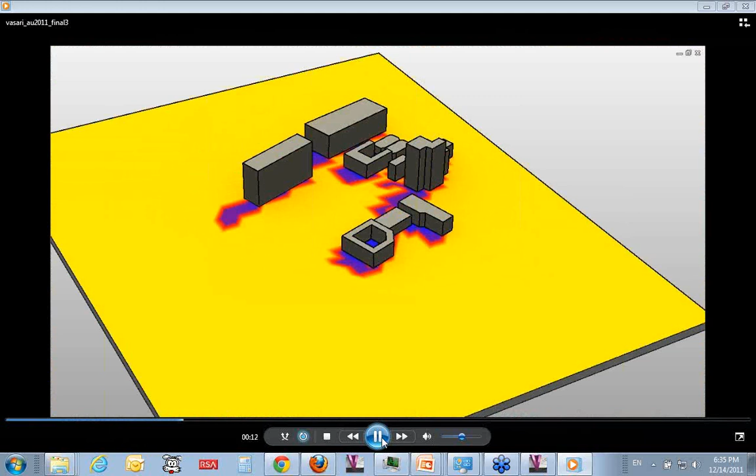Basically, with Project Vasari, and let me know if this doesn't play well here, it looks like it's keeping up, you can start to do some preliminary understanding about the site, look at various ideas of blocking and stacking and fitting programmatic requirements into a design, run it through a various set of design analysis, looking at solar radiation, whole building energy analysis, and then tying that into a parametric model that you can start to control and configure, and start to figure out ultimately how well that particular design is going to perform, and then start to evaluate different options early in the design process, either for new construction or for renovation and retrofit work.

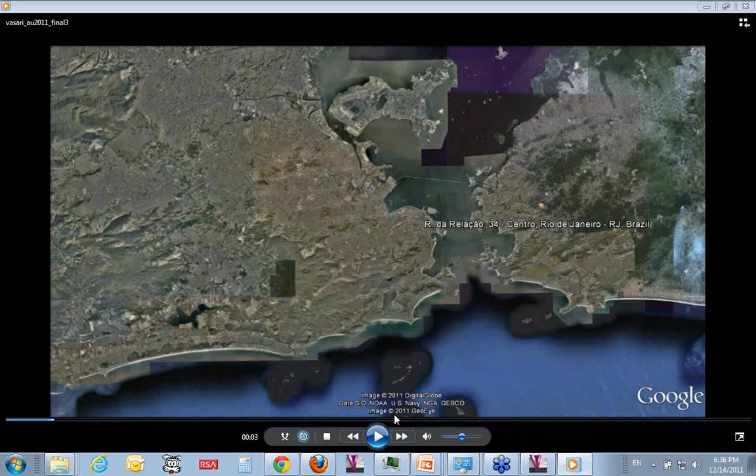So here's kind of just the general vision of what we're doing. A lot of the features that we're talking about are tied into new technology that we're working on inside of Autodesk, specifically related to the cloud and analysis, right? So we're moving away from pure modeling into what else we can do inside of the cloud and tying into other capabilities that don't just run on your local computer. So just kind of a quick overview of what we're doing.

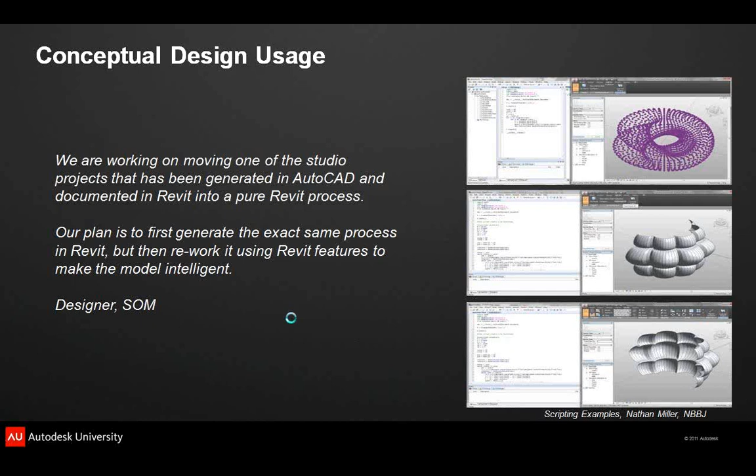A couple things over the last year, I'm not going to read all of these, but basically there's been a strong resonance in the industry using these kind of tools, streamlining workflows, tying things together, and ultimately trying out as many different ideas as possible early in the process and informing the overall later design from there. Both at the low end and also at the high end, looking at various scripting capabilities, and now looking into visual programming capabilities as well, and at a variety of scales, both at the macro urban scale and all the way down at the detailed scale. And ultimately what we're trying to do is take capabilities from a variety of different tools and integrate them into a main design application.

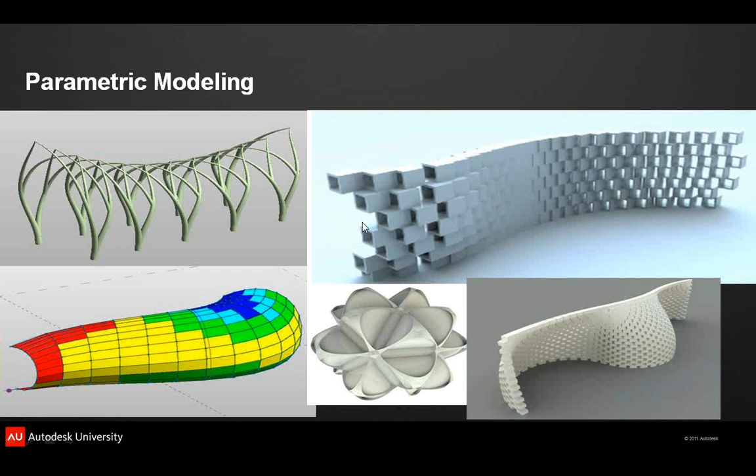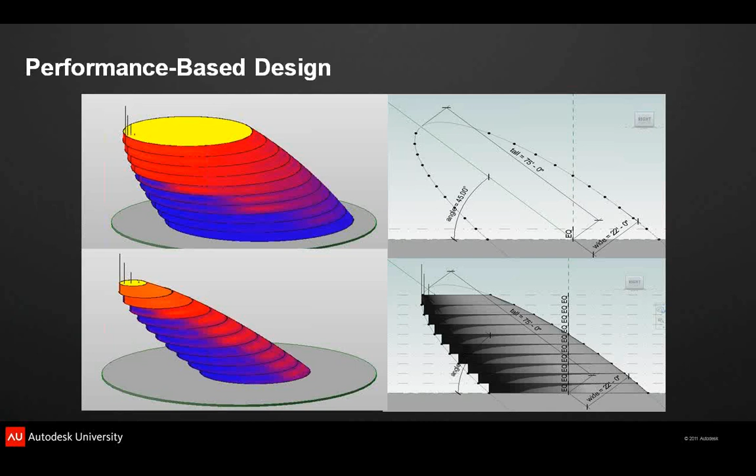So just real quick, started from Revit 2011, slimmed down, focused on 3D modeling. A lot of parametric modeling, so focusing on not just making an overall form, but assemblies of forms that understand how they relate to each other, and ultimately behave as essentially a big rig that you can change one thing and have it propagate through the rest of the design, and operate on that in a variety of different ways with various user interface techniques. The idea of integrated analysis, so having things that are happening real time in your computer, you don't have to hire a separate consultant or export to a different tool. And then looking at more advanced things that used to literally have to run for multiple days at a time now can be run on your desktop in real time.

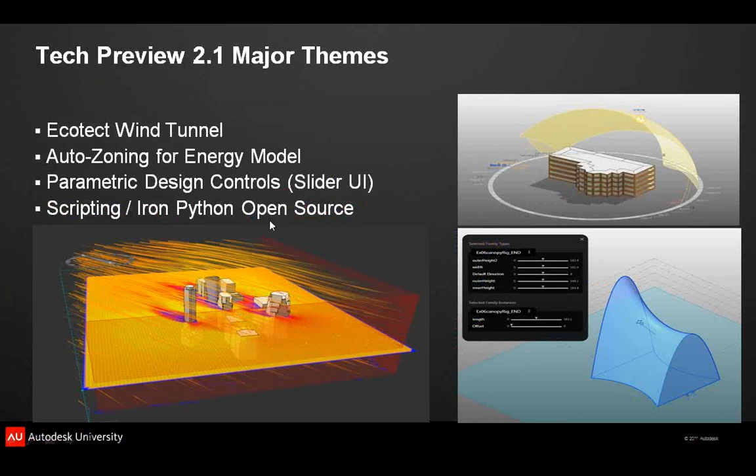So I'd definitely encourage you to take a look at the new tools that we have. We have some pretty interesting things that we're working on around simulation, around parametric modeling, and ultimately making things usable for a larger audience outside of the Revit ecosystem. So that's just kind of my quick overview here. Basically, we think that the industry is kind of at a cusp on how people are looking at not just conceptual design, but overall modeling.

And there's a lot of push towards integrated analysis and ultimately getting to something that's more sort of performative design or performance-based design. And we'll talk a little bit more about that in the future.

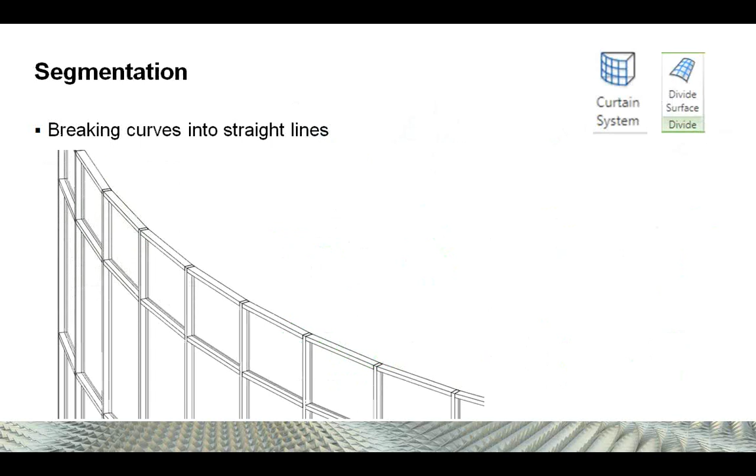In Revit, one of the basic ways that you can start taking complex geometry and breaking it down is through segmentation. We've got a set of tools that are particularly made for that: curtain system and divide surface. There's some distinct differences between each of them. The curtain system was something that was created a few years back, particularly around stick-built geometry, or stick-built sort of storefront curtain system. And divide surface, which is sort of a more generic way of spreading or repeating points along a surface and sort of connecting the dots.

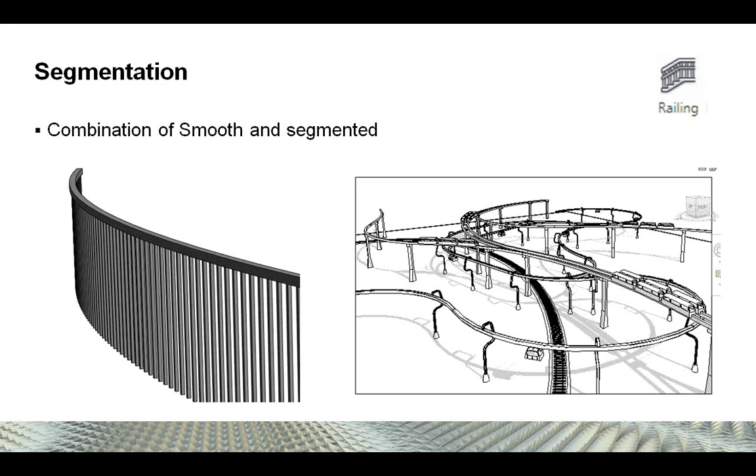Railings, which have been misappropriated in all sorts of ways, because by and large, geometry for architecture are very small elements that are repeated many, many times. And the railing tool is one of the tools that can do that. So people end up with all sorts of geometry in their buildings that are called railings that are really not. But at base, what you're trying to do in this sort of discretization of your complex geometry is breaking complex geometry up into individual pieces and making manipulations on them. And this is quite handily dealt with by this divide surface functionality.

And ultimately, after you sort of divide up complex geometry into individual pieces, you want to replace those individual points with real geometry, whether that's you're making a paneling system for a wall or you're wanting to make a precast element to go into a piece of bridge geometry. It's about sort of breaking things up into these pieces and replacing them with something real in the end.

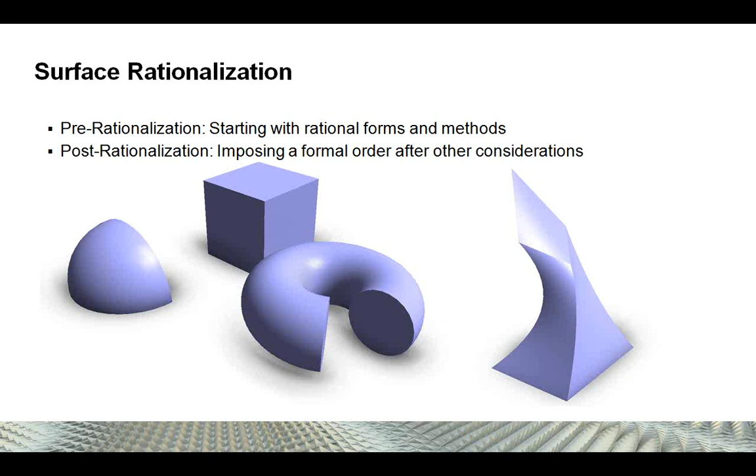And lastly, and this is the part that I'm going to want to pursue a little bit more in depth, is this idea of pre-rationalization versus post-rationalization when you have complex geometry. One sort of large bucket of approaches is to say, I've got rational forms and I'm going to mix and match them together to make something that is complex. And then another is to say, I'm going to make a sculptural form and then I'm going to break it down into something that I can actually build.

And when getting into this idea of rationalizing complex surfaces into buildable pieces, there's sort of two large buckets of places where you would want to go: triangulation versus planar quadrilaterals. There's different advantages to each. There's an idea generally with planar quadrilaterals that you get a nice square flat piece of material. It's going to be lighter, it's going to be glass, it's going to be more transparent.

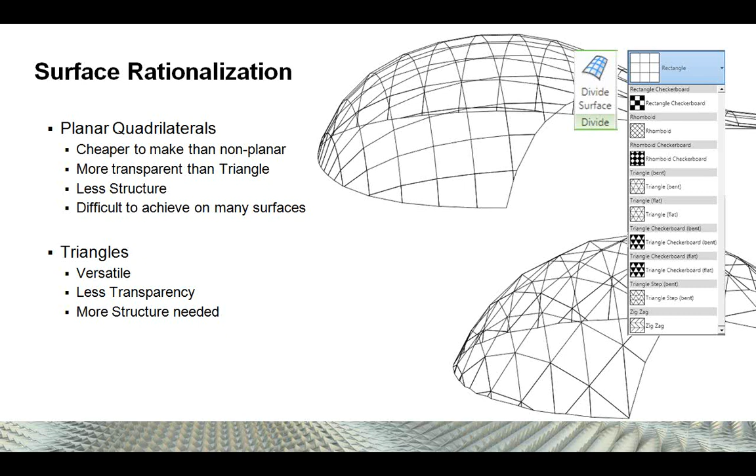There are certain efficiencies in using that. It is generally less flexible breaking up geometry into planar quadrilaterals. So there's some trade-offs in each, and again, I'm going to get into this more in a bit. Just going to run through this stuff.

And lastly, before getting into some examples, reporting. There's something that you can do in Revit that is almost completely banal, and it's not even worth talking about in some ways, which is that you can get all your pieces and you can list them out in tables and schedules and filters and views. So you can start analyzing your building geometry into pieces that you can isolate into spreadsheets and other things.

You can get non-geometrical output from it. But if you use a couple of other tools inside of Vasari and Revit, you can start really beefing up that kind of tabular data or graphical data that you can get out of your model.

One thing that I talked about last year at AU, sorry we keep referring back to AU, I'm sorry if you didn't get to go to Las Vegas and get jet lagged and drunk,

was this idea of creating components and panels that you can cover your surfaces with that will start telling you information about them. In particular, something that I talked about last year was looking at deformation, looking at surfaces of forms and saying whether or not you could break it into flat pieces or whether they needed to be more complex curvature.

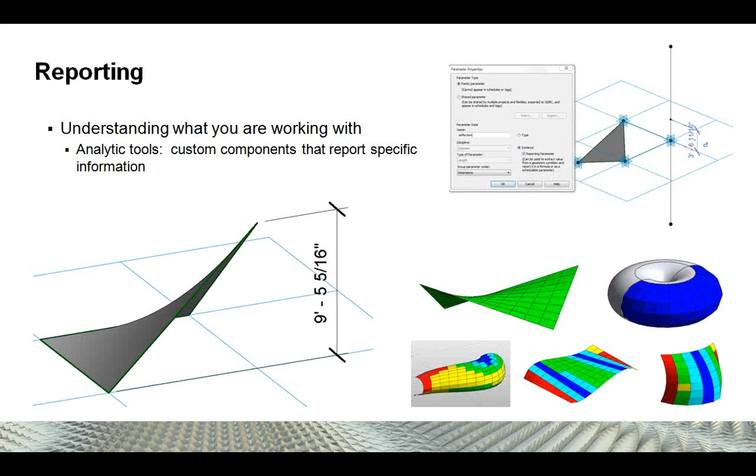And I'm going to use this panel, and if we have time we can explore the construction of this, which is a more beefed up version of this. This is a panel which you can repeat over any kind of geometry, and it can start informing you about what's going on with that geometry. It can start telling you things, not only is it flat, but are the edge lengths similar, are the angular relationships similar.

It's basically using this out-of-the-box functionality called reporting parameters. Has anybody here used reporting parameters? Anybody? A couple of people. A couple of years ago we put in this functionality, which is essentially this awesome little dimensional tool where you can connect 2 points and it just tells you what it is all the time.

And you can take that information and read it out in schedules, you can use it to drive filters, but basically it's a way for you to label geometry in your model in such a way that it can tell you useful things about it. It's not like a regular dimension, or like a driving parameter as you use other places in Revit, but it's just something that is giving you feedback.

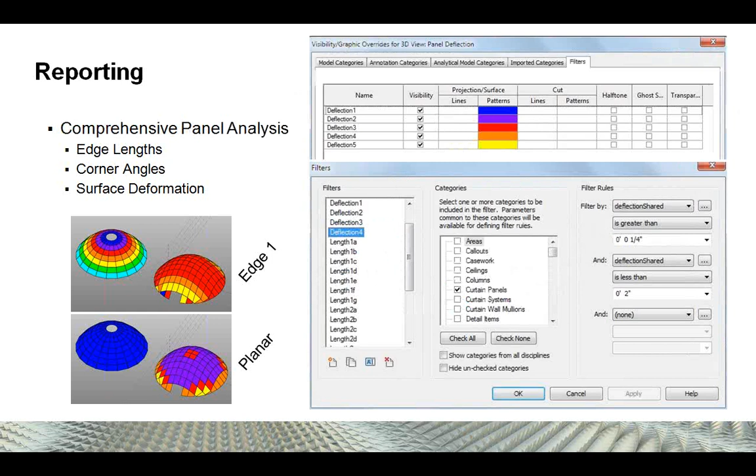And again, you can take that information and drive it back down into the data model of your Revit and get information out from it. So, a couple of projects where you could use these. These are theoretical projects that were done in other software applications, but you could have done in the new tools in Revit and Vasari.

And I'm very happy to say that there are 2 pachyderms. The Elephant House by Foster and Partners at the Copenhagen Zoo, and the Hippo House by Schlaich Bergermann and Partners at the Berlin Zoo. These are 2 reasonably complex pieces of geometry, I think one was in GC and the other one was done in Digital Project.

And they use these 2 different paradigms, I think, for form making. One with the Elephant House was based on using geometric primitives to do form making, and the other on doing a rationalized system for making forms. I'm going to explore a little bit about what that means.

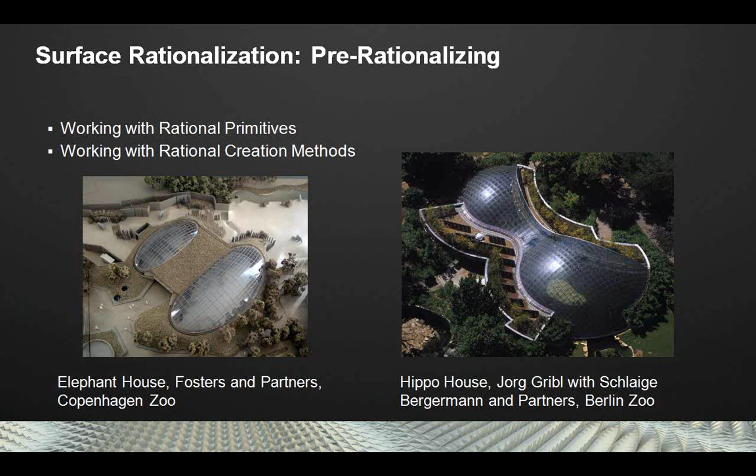So with working with rational primitives, it's basically how do you accumulate things that have known surface properties, toruses, spheres, cubes, and how do you recombine them to make your forms, a tried and true way of making forms. And it comes up with donuts. Homer Simpson and Sir Norman Foster have this in common. They both love donuts.

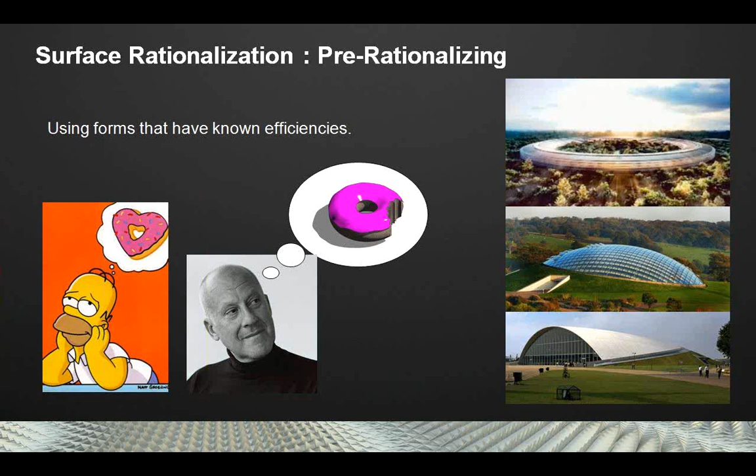On the right, we have the Apple headquarters in Cupertino, a house in England, and the American Air Force Museum, I believe, in the UK. They're all sections of toruses, and toruses have this great property, along with that donuts are love, and I like donuts myself.

So again, here's the elephant house. Looks fairly complex. But when you break it down, you've got two intersecting toruses where you cut off the top of them and panelize them. So pretty straightforward. And it can be constructed in such a way where you just have four parameters, basically four radiuses, the outer radius and then the inner profile radius, that define the entire complex geometry of the entire project. And by manipulating those four parameters, you can get all sorts of variations in the form.

And then going back over to the Hippo house, we've got something that's a little bit more complex. It takes a little bit more heavy lifting and a little bit more thinking to get going on this project, but I think it's really pretty interesting to look at. Before getting into this, I just wanted to look at a particular way of making forms. So here we've got different methods to make nearly identical forms.

We've got a revolve, we've got intersects, which is basically when you take a form and we've got a tool for basically like a big egg slicer, just chopping right through it. And then this form that I want to talk about a little bit called the translation surface. And the different properties that these different, almost nearly identical forms have. So here we've got the revolve surface, the egg slicer surface, and the translation surface, looking at deflection and looking at edge length.

Sorry for the rainbows. I haven't really come up with a good pseudo color combination yet. But what we're seeing here is, again, the banding with the revolved surface, which is very much like that torus that we were looking at. And then on the right, you've got all same edge length and all planar surfaces with this translation surface.

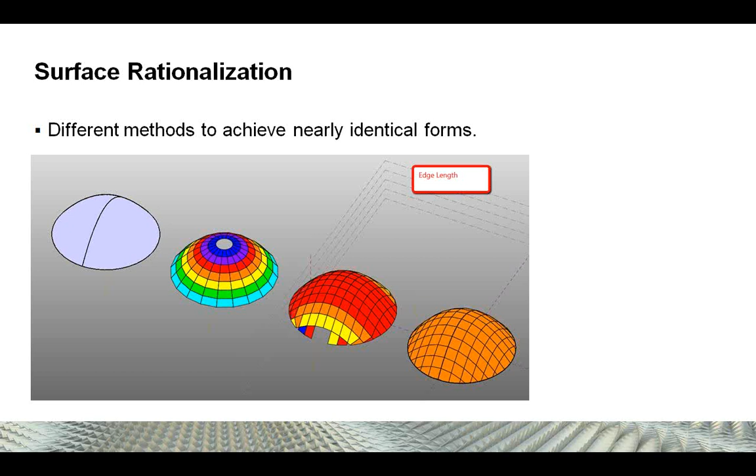And this kind of surface rationalization with the translation surface is something that people have been using for a long time now in packages like CATIA and in Generative Components to make complex geometry that's really quite buildable. There's a couple of good papers out there on that. If you're really interested in this, I highly recommend pursuing these papers here, Parametric Strategy for Freeform Glass Structures Using Quadrilateral Planar Facets. Or you can just do a Google search for Jim Glymph and Hans Schober, and you'll pretty much hit this.

But the basic principle is that if you lay out a bunch of parallel profiles and you sweep them together, you can get these surfaces that have these magical qualities of being remarkably similar to each other and flat. And so I'm just going to really run pretty quickly through this. So we've got the Hippo house here, sort of roughed out in Vasari, and what we have here are 5 different versions of coming up with very similar geometries.

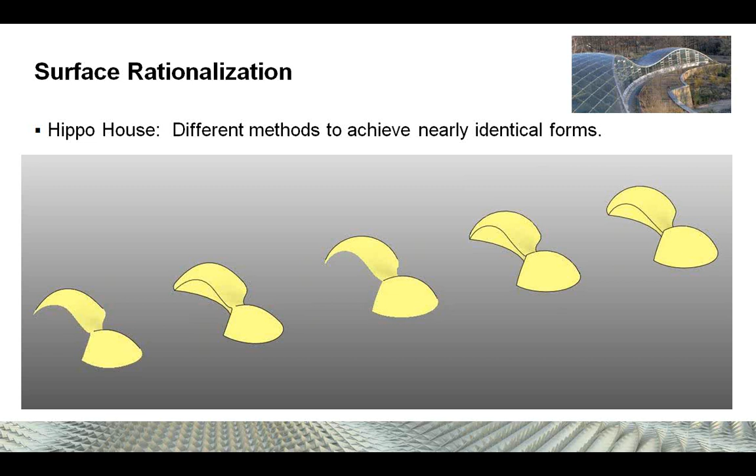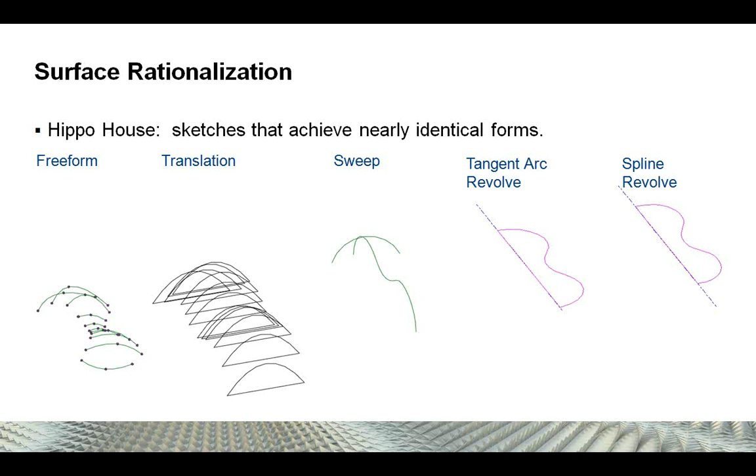We've got freeform geometry here on the far left, and this is basically just push-pull points all lofted together. We've got a translation surface, which is that big jumble of spaghetti. We've got a sweep, which is just taking a profile and sweeping it along a path. And we've got 2 different kinds of revolutions, tangent arc and splines.

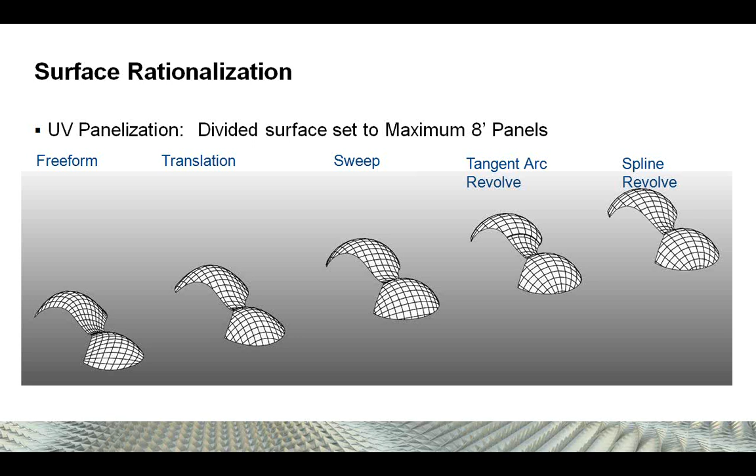And just looking here at the translation surface, we've got that big jumble of spaghetti. And basically, if you take a bunch of profiles and you sweep them all together, and then you chop out the shape that you want from it, you can see that that's the translation surface there, 2 in from the left. And this is basically the way that the natural panelization happens when you're using the divided surface functionality to cut up that surface, just using different form-making strategies.

And then applying this panel that's all tricked out with these reporting parameters, you start to be able to mine your forms for all sorts of information. Here is just looking at surface deformation with these different panels, blue being really flat, and yellow and orange being really not, or very expensive.

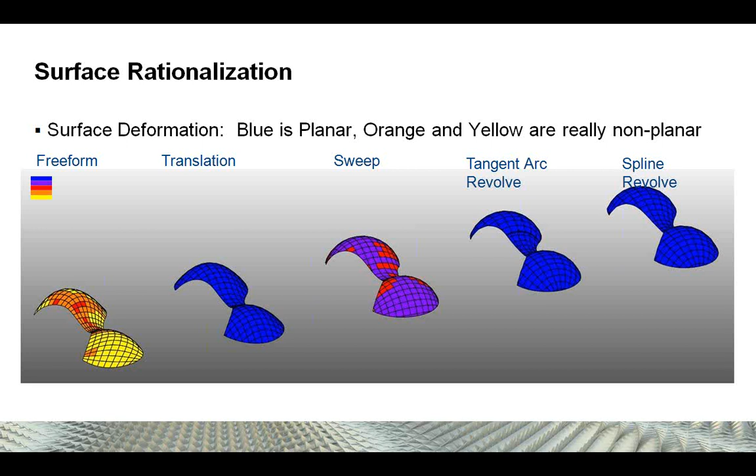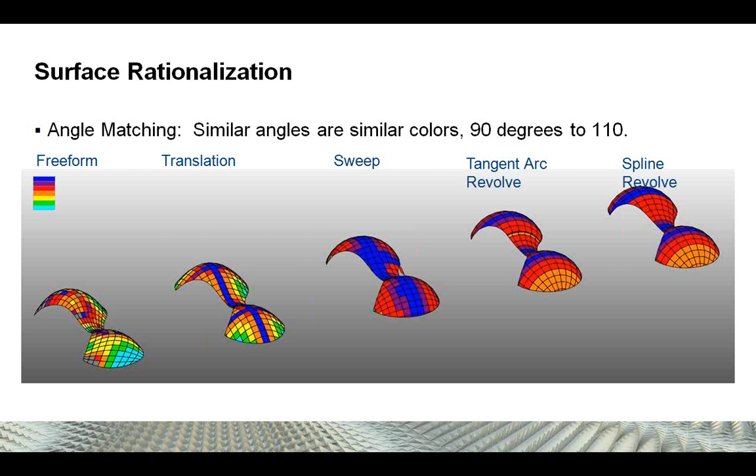And then finally angle matching, and this is where, if you've got a rhombus like this, how do you find other rhombuses that have the same angles? Again, this is just by putting a bunch of information into your curtain panels. You can then mine your surface for all sorts of information about it.

And then you can go back and take a look and say, well, what suits my needs for my project better? Do I need something that has identical panels? Do I need something that just needs to be similar to each other?

In the end, this project was done as a translation surface. I sort of cheated. I just went and found one that was a good example of translation surfaces and tried to do it in Revit. It's pretty easy.

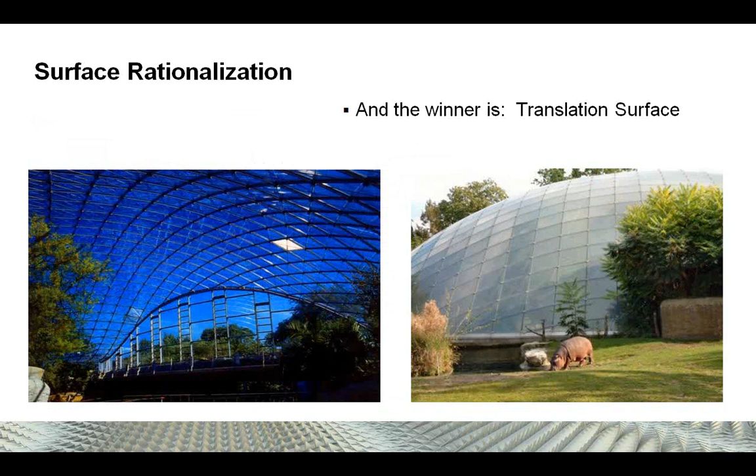And in looking at these sorts of projects, you just sort of need to know what it is that you're needing from a project. If you use these methods, you end up with ragged edges. You have to deal with Boolean operations, which sometimes can be a bit of a pain in the ass. And there's going to be some amount of surface approximation when you're doing this. And there are aesthetic pluses and minuses.

But in general, these are methods that, for people doing complex geometry, really make all the difference in the world for cutting down on costs, increasing things like transparency. And for the most part, people are not doing this sort of work in Revit.

But what I want to just demonstrate is that this is entirely possible, and it's actually pretty easy once you get going on it. I just did a blog post on it too, which is showing the steps for making this sort of surface.

I want to do some more posts that actually show the construction of the reporting panels that will start mining your model for data.

Why don't we come back to it at the end if we've got time? I want to just make sure that we get through all of our other information and we can see. 25 minutes we've got. Okay.

Should we jump into it now? Yeah. Okay.

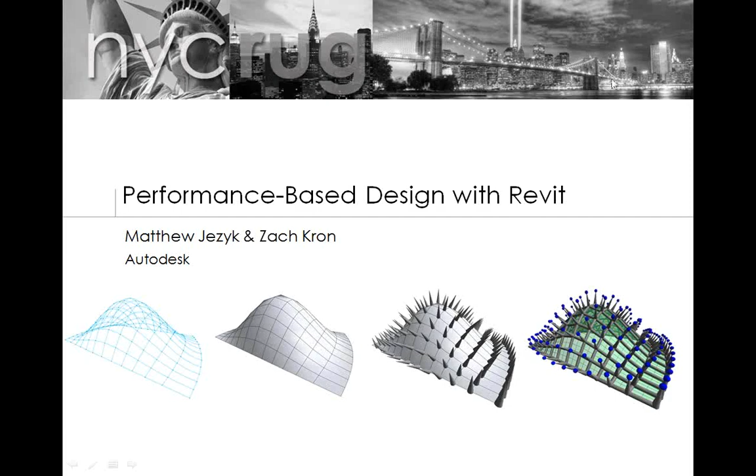So what I'm going to do is I'm just going to open up... how do we get out? I'm just going to open up one of these models just to show you how these pieces go together for this particular kind of form-making exercise.

Pardon the dead air.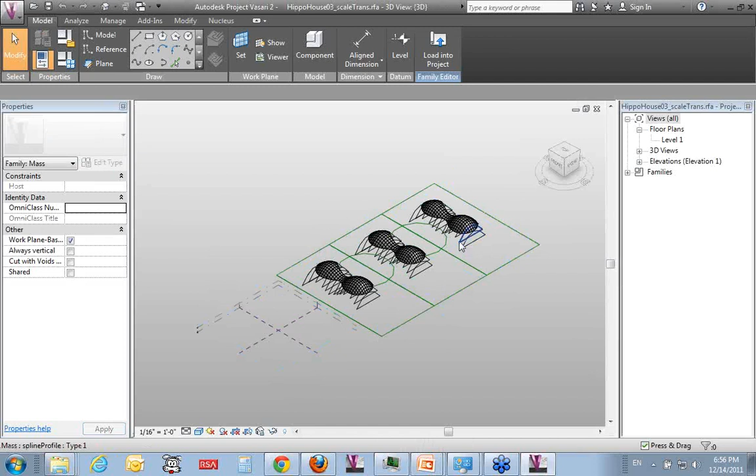So after going through the process of looking at that one scale translation surface where you've got all these profiles basically swept through each other, I was doing some refinements of it actually on the plane on the way down here. I thought it would be sort of fun to look at.

So here I've got that same form that we were looking at. And before even getting into all the fancy work of how you can get the reporting parameters to tell you all sorts of information about these things, one of the things you can do when using the panelizing tools is just visually inspect these things.

Here I've got a panel that's been made on one of these surfaces, and if I just look at it, I can go in and visually inspect and see that in fact I've got this thing that is absolutely flat, and so I can start building up a little bit of trust in this process this way.

And if I look at this whole surface, if I just select all the pattern components, using out-of-the-box Revit functionality, you can see if you look at the parameters here, these are all of those parameters that are in that individual panel. And I've selected all of them on the surface, and they're all showing up as the same, so I can start understanding what's going on with the surface.

And also, if I just look at how this panel is put together, where is it? There it is. I'm going to edit this guy.

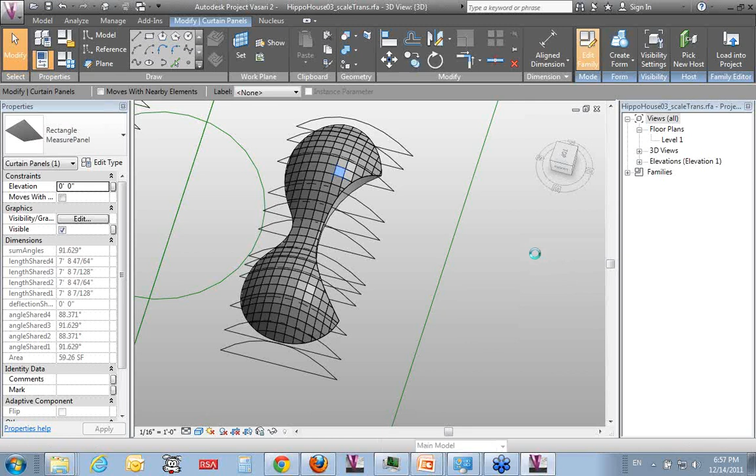There's not a whole lot of information put into this guy. It's just a regular quadrilateral panel, and for each edge I've added one of these reporting parameters. Its only job in the whole world is to tell me how far it is from here to here every time this is placed in a project. And I've got angular dimensions in there too.

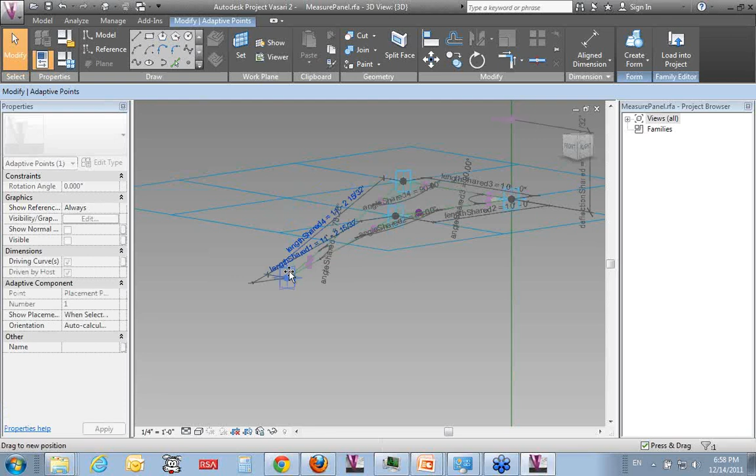And I've got this one little point up here that is driven by its association with a triangle out here. So this guy is basically hosted on the intersection between a line going up from the panel and a plane extending across the panel. And what that tells me is, am I flat? Or not even just am I flat, but how not flat am I? You can see that point going up and down, and then it has hooked onto it this reporting parameter, which is just driving out all that information so that I can tell how flat my panel is.

So again, this is just a tool. This isn't really a panel that has real end geometry, but it's just a way to start analyzing your model.

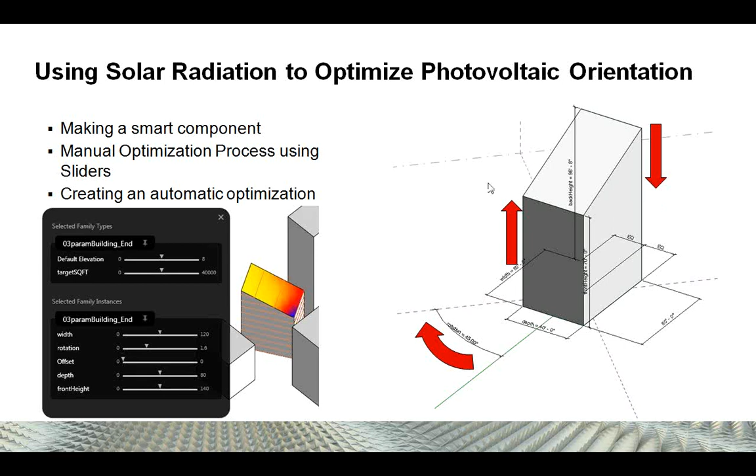So same kind of principles we just talked about. In this case, we have kind of an urban context, and basically the example is I'm trying to site a new building, and I'm trying to change things like rotation and the angle of the roof to find essentially an optimal position for photovoltaic panels.

And the way I'm going to do that is not by manually changing something, but by using a new open source project called Dynamo, by a gentleman named Ian Keough, who used to work at Buro Happold in New York. Now he's in LA, so he's a local guy. He used to be around here until last year.

And we've been collaborating on something recently that is an open source effort. You can go and find it online. Definitely encourage you to take a look at it if you're interested in these kind of visual programming interfaces. So basically what he's created is a way to drive the Revit API without having to program, just by connecting visual nodes together in a way that's been around in the industry for a number of years now.

And what we're doing here is tying these things together for a very specific purpose: taking a parametric model we've already created and tying it to suck some information out of some analysis we're running, taking information from a CSV file, from an Excel file, munging that data around, tabulating it, and then pushing it back into the model to change a specific value. And then we build in some logic that basically does a really trivial type of optimization just called hill climbing. So it takes the current state, compares it to a new state.

If the new state is better than the old state, use that state. Just keep going up until you hit the maximum. It could be a local maximum, but you're basically there, and that is an optimal state in this condition.

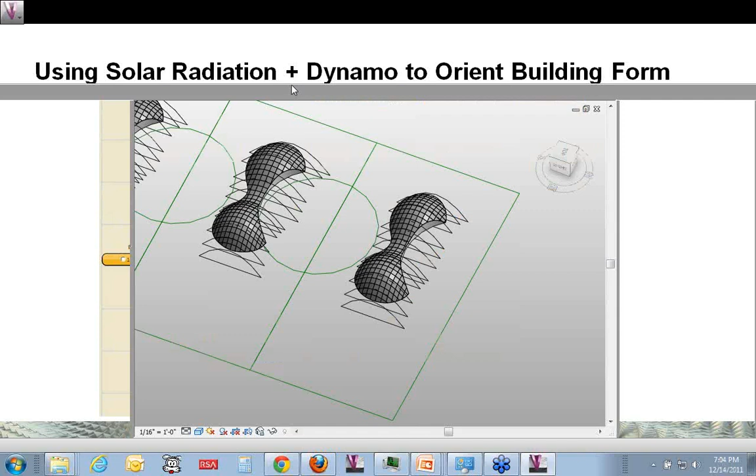We have a link in here, we can bring that up as well. You want to show something? Yeah, if people are interested, we can do a quick demonstration of it. Yeah, I can run through that live here. Do you have it? There it is. Okay, any other questions while we're getting that going?

Yeah, Mike. I've heard there are restrictions on Vasari if you want to work back and forth with Revit, and that there are file problems or incompatibilities, let's say. If you're working in Vasari, do you have to start there and stay there?

So the question is, what are the restrictions—how does Vasari relate to overall Revit? The way we've designed and set this up is that it's a cut-down version of Revit. It's file format compatible with Revit 2012, and it operates on RVT files, so project files and family files. If you create something in Vasari, you can take it into Revit, no problem—it speaks natively. We do have restrictions the other way: you can open up a file from main Revit, and if it has detailed elements like walls, doors, beams, ducts, pipes, they'll still show up, but you won't be able to make new ones, because this is focused on the conceptual stage.

You might have also heard about another cut-down Revit project out there, a separate project called Spark, which has different restrictions about moving back and forth between the two. But really, what you're getting in Vasari is the same file—you can open one and the other and move them back and forth. Vasari will disallow a certain amount of element creation: if you open a Revit file in Vasari, it might have walls in it, but you won't be able to make new walls or do certain manipulations on walls, because walls are part of a detailed element workflow, and Vasari is working in an early-stage design process, not with things like windows and walls. So that might be where you heard that, since Spark does have a different set of restrictions. It's also another awesome project out there.

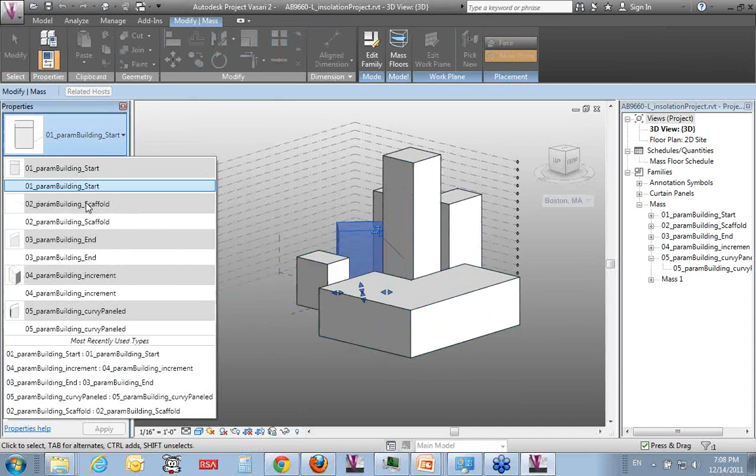Because we're a publicly held company, I can't comment on future functionality as far as commitment to certain time frames. But there are some things that could show up there in the future. Yeah. I have to be vague. Sorry.

Absolutely, yeah. So the question is, if I build something in Vasari, will I be able to import it into Revit and use it? So interestingly enough, all the stuff that Zach showed and all the geometric manipulations that we're doing today, you can do in main Revit as is. In Revit 2012, you can do the exact same stuff. And we've had that functionality. Our teams have built that over the last couple of years in the main product.

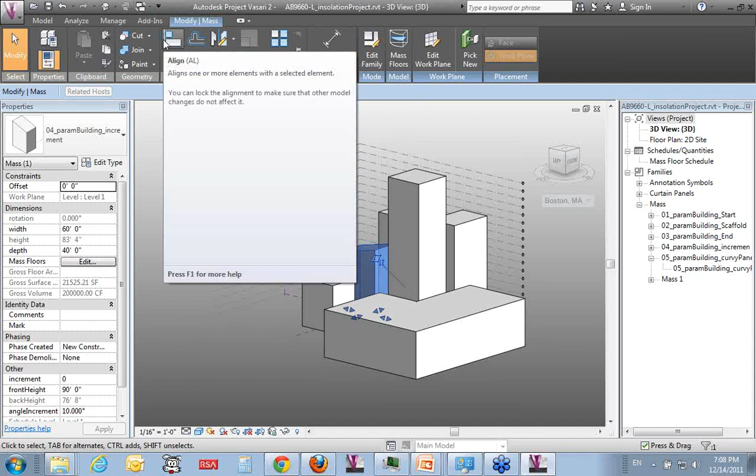But the thing is, Revit's kind of a big, complicated beast right now. So it might not be inherently obvious how to actually access some of that stuff. But certainly it's possible to do the same thing. And if you make something here, it will go into regular Revit in the same way. Does that answer the question? Yes. Oh yeah. The same kind of shapes, lofts, NURB surfaces, all the things that we were talking about here.

One of the confusions about what you can and can't do in Revit and Vasari might also come down to there are certain tools that are enabled in certain families that are not in the main project environment. And that's true for both Vasari and for Revit. So the massing tools, the curtain panel by pattern tools, and the, what do we call it, the generic model by points? Yeah, adaptive components.

Adaptive components. Those are all particular family and modeling environments that have particular superpowers for making basically more freeform shapes, more flexible shapes, but it's the same restrictions in both Revit and Vasari.

Yeah, so these types of families that you can make, a lot of the behavior and functionality in Revit comes from which template you use. So if you open up the mass template or one called adaptive component, it won't have the standard extrusion, sweep, revolve, blend ways to make geometry that you might use when you're making a chair or something like that. It gives you kind of a more free-form way to create things.

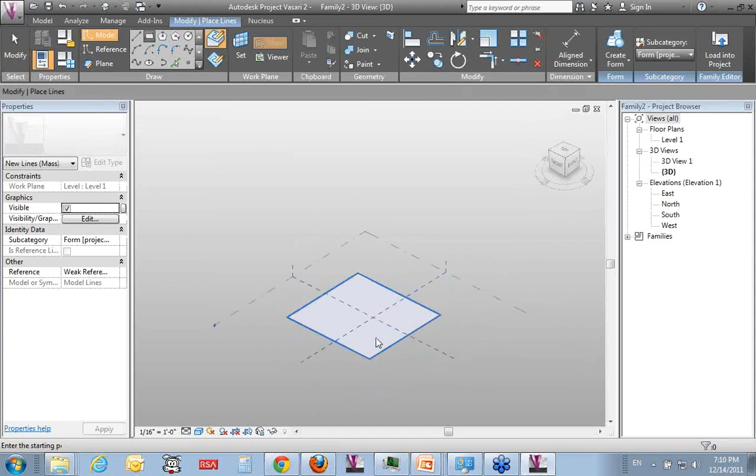Yeah, it's still in there. So the basic idea, and this actually got introduced in Revit 2010 a few years ago. So you can do a level of direct manipulation, start grabbing vertices and points and move them around. But then you also still have parametric control underneath that. So you can always go back in and start modifying the underlying geometry and editing the sketches and things like that. So it's just a different way to create and manipulate geometry that actually matches industry standards a little bit more, kind of where things are headed.

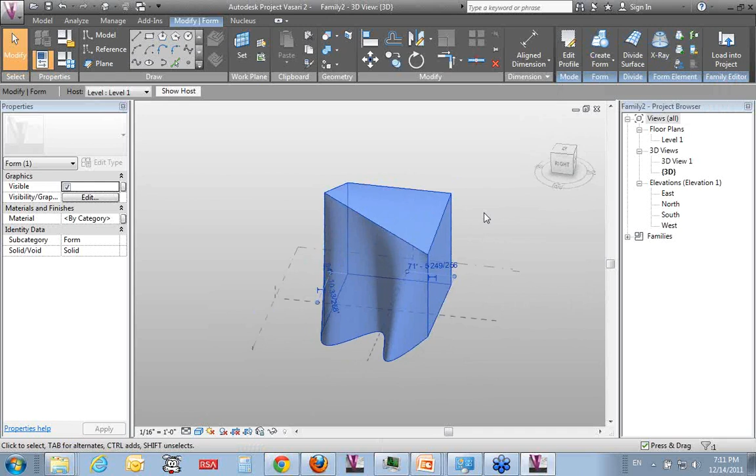Although, just a question for the room. How many people here have actually ever hit the Create Form button? Okay, so a few people. So this is hopefully a way to open up. There's some other features that might not have been used in your firms before that aren't necessarily just for making massing studies. As Zach showed, you can use these tools at a variety of scales and different levels of detail. So we've been using them with fairly advanced firms on the type of work that Zach was showing previously.

So that's to answer the question. This is all the same functionality that's in Revit 2012 and 2011 and 2010. So it's been around for a couple of years. Exactly. So what we have done in Vasari is smooth out some of the user interface.

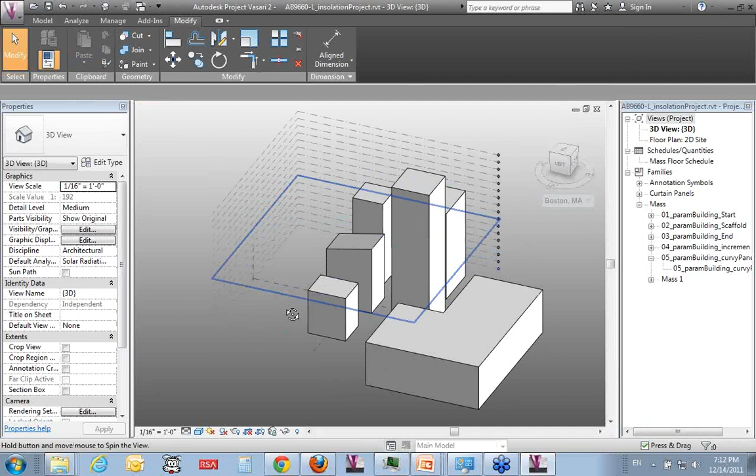So for example, if I was back in the project environment, let's see, this is Zach's computer, so not mine. So a couple things that you can do, like in this case, I'm in a project file now, and there are some various things you can start to do. Just start double-clicking to edit families, say for example, and the context that you're related to will start to gray out. So various things like that, you can more smoothly go in and out of different modes and contexts from there. Any other questions?

I can get into the Dynamo things. Oh yeah, what was the question? What I wasn't clear about in the presentation was your intended transition from the conceptual surface to the material thickness. At what point would you model and document, and at what point keep the integrity of a mathematical surface? Is that something that you just run back into the Revit world, or more in Vasari?

Well, ideally, okay. So the question was, at what point do you go from the conceptual, the mathematical or more abstract way of looking at the project, and get into real-world geometry? When do you actually start making thicknesses of things and offsets? Ideally, you never have to make that decision. You can move back and forth because the underlying form is,

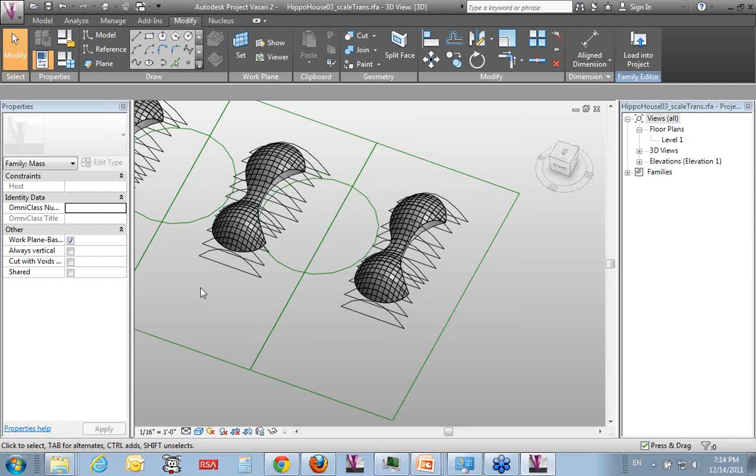But even at the more detailed level, these tools that Zach showed can actually support creating stick-built or unitized curtain wall at different levels of detail. So we have people that take these panels Zach was showing, and not just create a single surface, but start thickening them up, adding materiality and other aspects that represent real-world buildable pieces, not just at the conceptual level. They would use those for documentation purposes as well, and then hand them off to a fabricator.

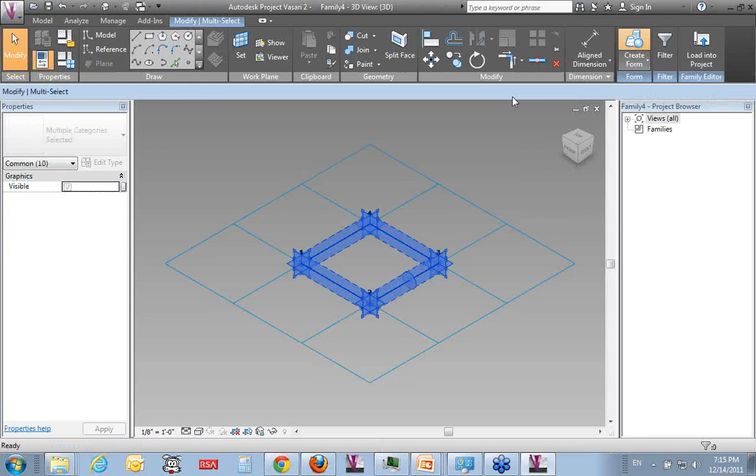Yeah. So, for instance, I'm not going to reload this one, but if I make a new curtain panel, I can do a real quick workflow here, where I'll make something that has a real mullion on it. Give it a weird round mullion. I'll create a form from it. So say I've developed a real curtain panel, and I'm going to load it back into my family.

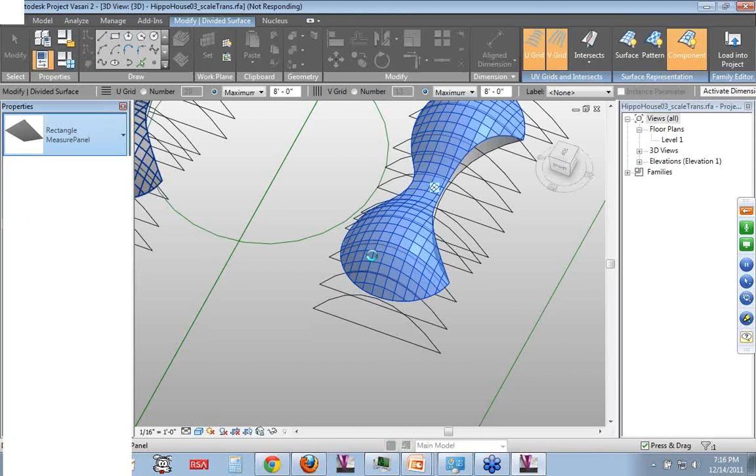And then you just have the standard parametric substitution, where right now I've got my measuring panel, which is not real-world geometry. It's flat, and it's just got all this weird reporting parameter stuff on it. But I can substitute it for the family that I just made, which has real geometry on it. And then it percolates through and populates the whole surface with thicknesses and other elements that I would want in an actual building, while it thinks about it for a second. Then that same geometry can go into your regular documentation, and also export that information using the scheduling features down to the fabrication level.

Nice, Zach. This is really good for a live demo. Dead air. It's good. But yeah, it'll come back in a second. So what other questions as this is coming back? Yeah.

You had alluded to a surface that was feedback with regard to solar insolation, and I was curious to see that demonstration. Oh, absolutely. So the question is, we talked about this feedback loop where we take data from a source like an ongoing analytical function, consume it, and then push information back into the model. And we'll show that in a second.

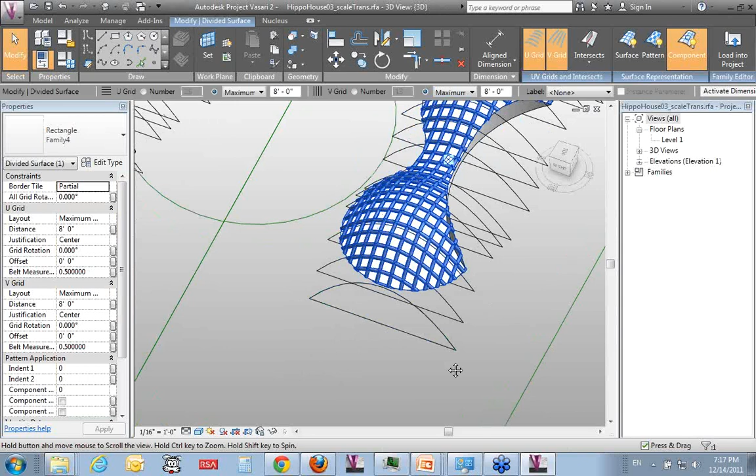Have you guys heard about this Dynamo thing? Anybody? It's really cool. I've worked with Ian Keough for a number of years professionally. There we go, there's that panel back. But this is a really cool open source feature that he's working on.

So here's the same panels that Zach mentioned before. Still representative at this level, and this wouldn't be how you would construct a unitized panel at all. But you can think about the exact same thing. There are certainly people doing this stuff on real projects today. Okay, any other questions about the curtain wall features? No? Okay. Just going to close out some of this stuff.

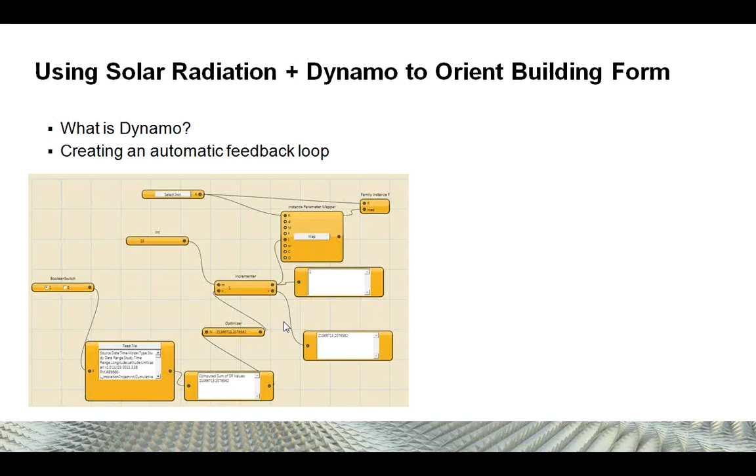All right, so this is the example that we used at Autodesk University a couple weeks ago. Basic idea is you've got an urban context here, and we have a site that we're looking at investigating, and some basic idea about a building, just a sort of overall kind of eggshell massing study.

And a couple things that we've built into this model are just a way to configure it to control its length and width and height, but maintain a certain level of volume and square footage. So we've built this family so that it literally just maintains a certain size as it gets squished around, just by using kind of standard parametric behaviors in Vasari and Revit.

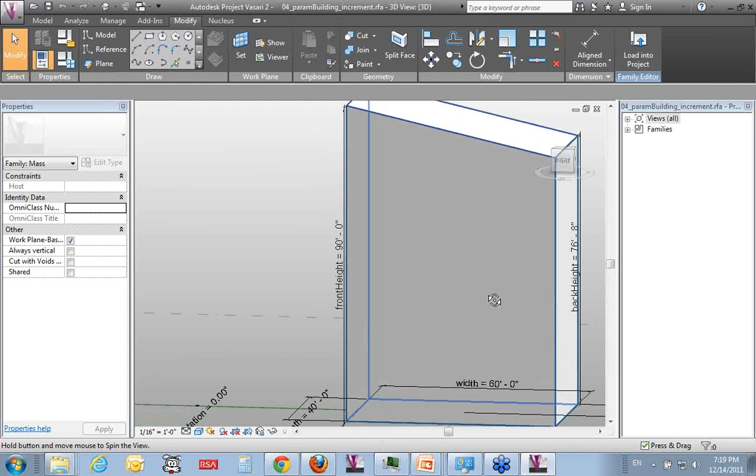The main things that we're going to worry about today are dealing with things like rotation. So we're going to look at how to rotate this to optimize for solar orientation, and then also dealing with angle. And the way we're expressing angle here is dealing with essentially two heights, front height and a back height. So there's two, and they're basically set up as a formula so that as you change one, it's going to sort of seesaw and modify the other accordingly.

Okay. So as I go back into that project, if I change one of these parameters here, like front height, if I drop that down to 30 feet, then the other side is going to go up to basically maintain the overall volume as a proxy for square footage. Okay. So as I change properties here, you'll start to see them update, and I can do them manually here, or I can do it via a parametric control.

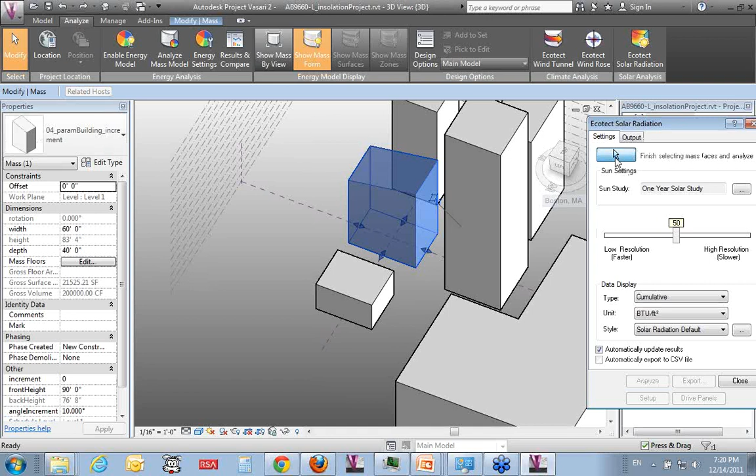When we start talking about the analytical features, I'm going to use a tool called the Ecotect Solar Radiation, that is built on top of the Revit API, and it's basically taking some calculations that are really valuable from the Ecotect analysis product that we have, and implementing them on top of the Revit platform and on top of Vasari. Basic idea here is that we are computing across a certain time span the amount of incident solar radiation for our site and for a certain location in the world.

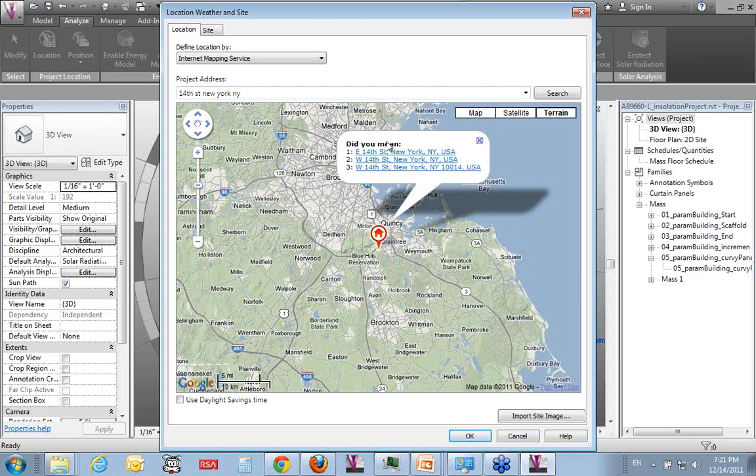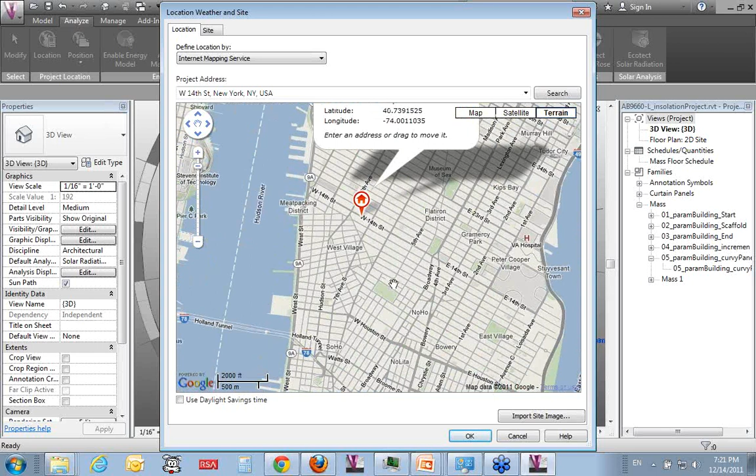Okay, so if we take a look just at kind of the first principle level, these things are geographically aware. Buildings are going to be placed somewhere in the world. This one just has a setup for Boston, and as I wait for the connection out, it's set to here. If I bring this down to the whatever 14th. New York. It's going to ask me, well, you mean west or east? So I can start to precisely position where we are in this context, and then a bunch of other things happen past that. Let's see, there we are. But the basic thing that we're using for this calculation is just latitude, longitude.

So what it's doing now is actually computing, based on this position, how much incident solar radiation there is for a certain time range. And we have this set to be a yearly study. You could set this to be a single still point in time, and you can start to see this obviously update as I change my time of day. It's going to start updating from there. The calculations will update. Okay, you see that?

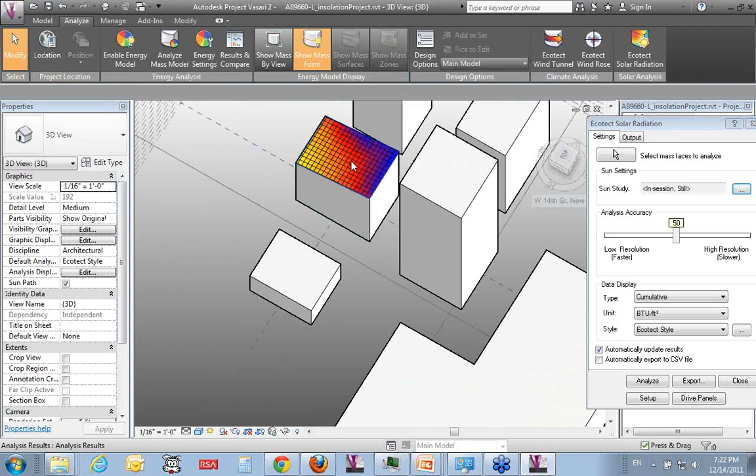So basic idea here is that we have these calcs that are happening, and this data is being represented graphically, just showing ultimately how much energy is coming in. But there's a series of analytical points that live underneath this, and you can start to show those as well. Oops. Yeah, you need to make the graphical use. Yeah. So just talking about kind of the underlying pieces of this overall connectivity. Okay. Oh, did I go the wrong way? There. Too small. I'll get this right the third time.

Okay, so we have sample points that are all being computed across the surface, and then real-time these calculations are happening for this. What we can do is actually not just show this stuff graphically, but export it out to a file. And that's what we'll do here. So we have the ability to export this information out. What I'll do is just set up an automatic export of this.

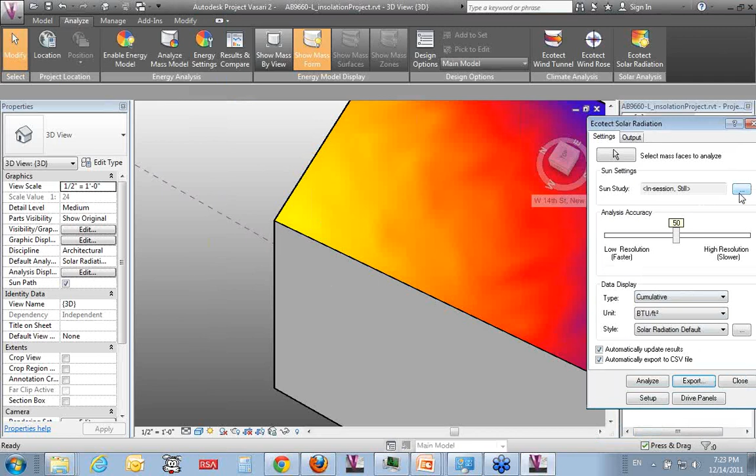And then let me just change this back to be the full multi-day. Okay. So now I have this data that's not just showing up here, but it's being exported out to disk. So there's a nice little file here, and if I open this up, you can start to just see the same data. And it's just a CSV file.

The relevant information that we have are, for each sample point, an amount of information, the insolation values for that particular sample point. Okay. And all we're going to do in this Dynamo thing is basically read that file and drive that information back in.

So now when we launch Dynamo, basically we have this kind of visual programming language that can run on top of the Revit API and Vasari, and you can add various pieces of data to this that represent portions of your model. I'm not going to go through the whole thing right now, just in the interest of time, but I'll just open up a couple of examples here.

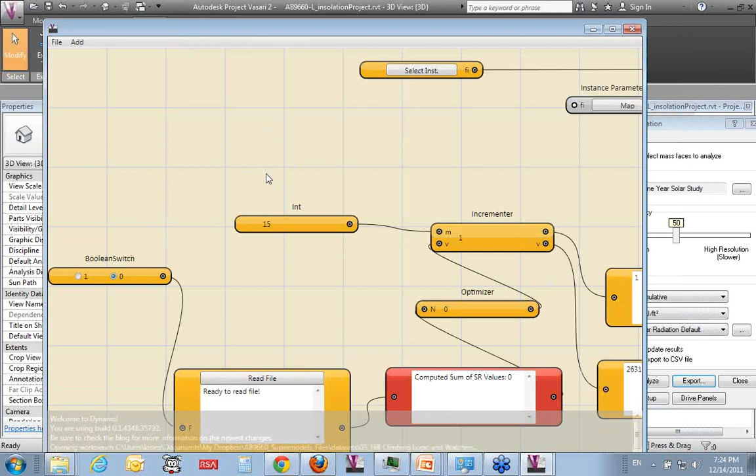Okay, so here we have basically the node representations of this workflow that we're talking about, or workflow. And what we're basically going to do is say we're going to select a particular piece of Revit geometry, a parametric family, by selecting that here. And all that does is basically tell Dynamo we're going to use this particular family downstream and then push some information into it. So basically, when you wire something up here, all you're doing is saying, okay, take that family that I've selected and interrogate it.

So there's a different node whose sole purpose in the world is to interrogate that family and start to show for this particular family, it has certain instance parameters. Let's see, there we go. Such as increment, front height, back height, angle, all that kind of stuff. And what this particular node is doing is digging in and saying, okay, for this, show me the instance parameters that are there in this family. And what we're going to do ultimately is drive information back into that.

And just one of the things that I keep coming back to for this stuff is that just this little node right here and this little node right here have sort of a whole world of other information embedded in it, which is sort of the standard Revit parametric family. Grab it, you put it in there, and you describe all this geometry that it does. That's all sort of packed into those two little pieces. And what we're going to do is basically try and mine that family for information and responses that are built into it.

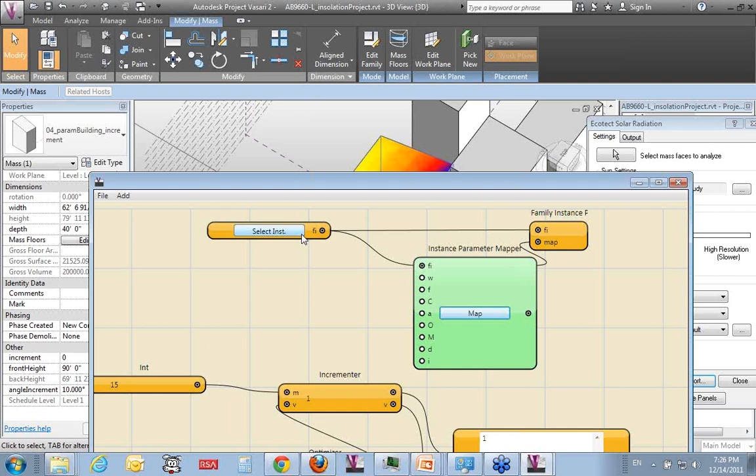Yeah, so if you've ever done any programming, and some architects have, some haven't, it's a way to encapsulate this stuff. You don't have to write code from scratch. You can write like a function or a class that all it does is just take inputs, do some calculations, and put some outputs out. You can think about families in that way here.

Okay, so just to kind of keep this short and sweet here, so now we know about this family. What we're going to do is hook up the other side of this equation, which is consuming that analysis result. And what we have is basically a node whose sole job is to read a text file.

So we're going to take that and let's see if we can go back to where we placed the output. I don't know where you saved out the file to when you were in here. Where did you go? I don't know where you saved it to. Well, let's just save a new one. Okay. Now I have the same CSV file in this location.

And all we're doing here is just reading that information in, that same text file that we just looked at. Now we read it in here, and we have a separate node whose sole job is to add up all those bits of data that we saw before. So this is basically a computed sum of, for the nodes that we have here on this surface across a time period of day, it's adding up that amount of energy.

And the goal here is to keep on changing the model until we have the most amount of energy for that surface for a point in time. By basically changing something like rotation or angle, we're going to step through a set of cases and change the model until ultimately this number doesn't get any bigger. It gets smaller. And that's what the other functions here do, where it basically says, hold on to the biggest value that you have.

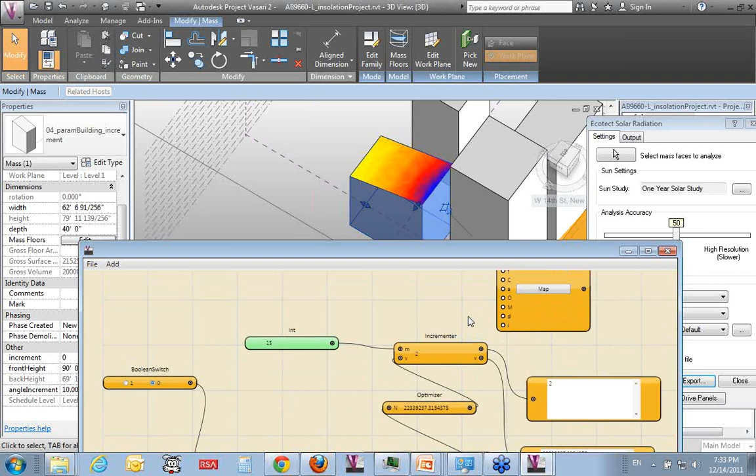Oh, sure, yeah. So the question is, if this is open source, does it have the capability to be wired into other platforms and things that are exposed and have various DLLs and open APIs? The answer is yes. This is built on top of the Revit API, which is built on a .NET programming environment. So our APIs are exposed in a way that is Microsoft compliant, using this standard way to expose things.

So Dynamo uses something on top of that and calls into the Revit API. But if you had other tools that can be accessed from a .NET programming language like C#, you can definitely call them and access that, either on your local computer or up in the cloud with a web service.

So there are other efforts happening right now that are pulling information in from some of our other cloud services. Like we have a conceptual energy analysis feature that runs a whole building energy simulation like DOE-2 up in the cloud. There's no reason why you couldn't pull that information down from a web service, not even running locally, and use that in a similar way to what we're doing here. Okay.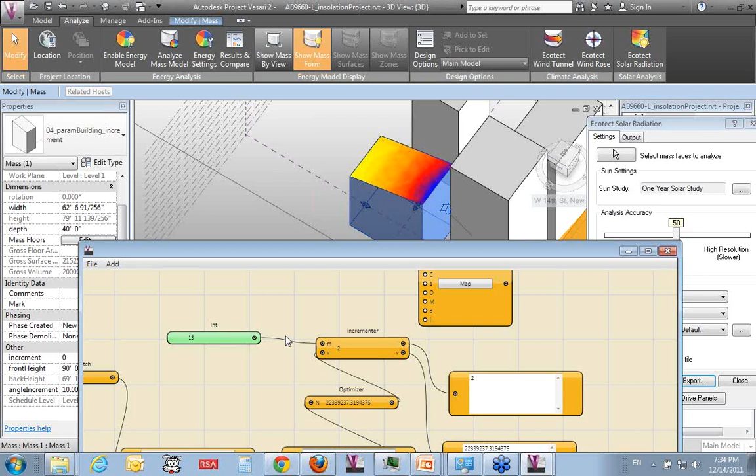With your optimizer here, can you continue to run the program and almost automatically find the best angle and rotation to maximize it? Will it go that far? So the question is, could you take this optimizer farther and give it multiple things to optimize for, like run through rotation, angle, position?

Certainly, that's a whole field of study. There are people that do a whole PhD on that. That could all be done on top of this type of platform. This particular example doesn't do that. It's just a quick and dirty example. So this just analyzes one design solution. Exactly. So what this does is basically just change rotation.

So what we're going to do here is hook up the output from this incrementer into the family just by connecting it here, and that tightens that loop up. So you can see that as I change that, the model updates here. It's changing rotation based on the input from this calculation. It's taking the current state of the model, analyzing that, consuming that, parsing the data,

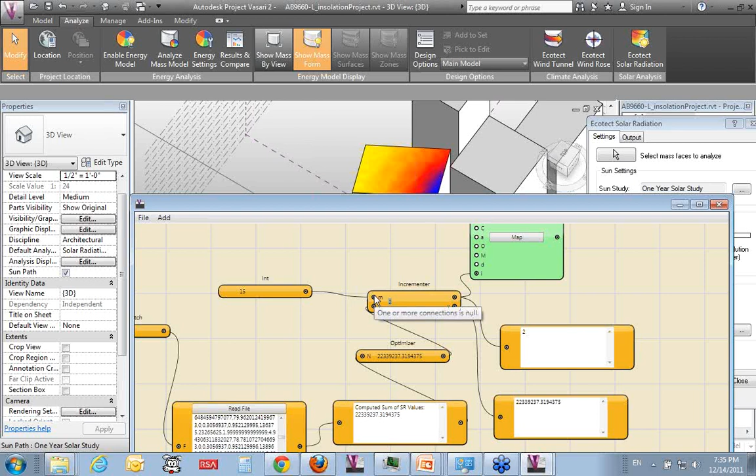and then feeding it into this loop, and ultimately changing an increment value in the family that is tied to rotation. So as you change increment from 1 to 2, it says take 2 times a rotation value like 10, which takes you to 20 degrees. Increment again takes you to 30 degrees, then 40, 50, 60. So as we step through, we're simply changing rotation, and because we're trying to climb this hill, it'll keep on rotating.

And this is a very constrained model, saying, for this urban context, not a green field where there's nothing else around, but in an urban environment, there might be a solution looking at simple rotation that might not be inherently obvious. So it'll keep on stepping until it finds something.

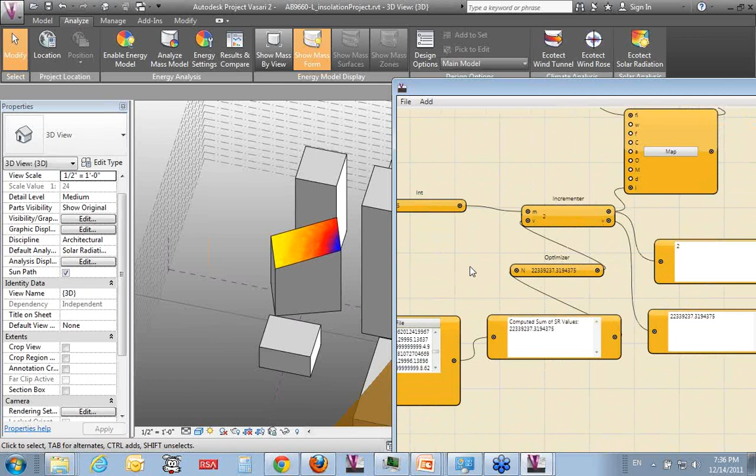Right now we're using this as a lab exercise at AU, Autodesk University. So instead of automatically running it, we would have people manually toggle this back and forth. By clicking on this button, it'll step it through the next part in that space. Let's see. Or should. What am I missing here, Zach? Is it writing new data?

Yeah. Might be that this path changed. Oh yeah, it's writing into the old. No, that's the right one. Yeah, that's the right one. Okay. Did we mention it's pre-alpha? Yeah, I was writing the code for this on the plane earlier. Okay. I'm in some kind of weird state. Yeah, I think something broke. Cool. Okay, so this is definitely pre-alpha. Let's try that again.

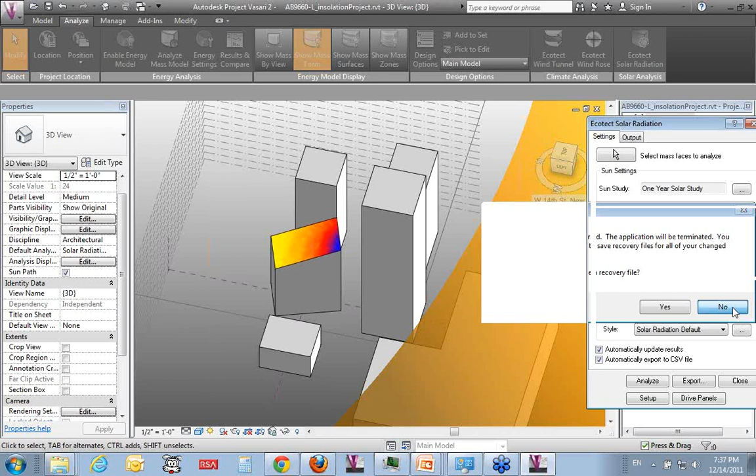All right, so imagine if you will that it kept on going from there. Okay, so in the interest of time, we can take questions while this starts back up. You're welcome to stick around and we'll show it in its pristine state, or we can just keep on answering questions along the way. Yeah, that's great.

Do you know anyone who's used this for zoning analysis? The question is, has anyone used this for zoning analysis? Certainly firms are using the conceptual modeling tools for various types of zoning, looking at FAR, looking at blocking and stacking, and configuring information. Firms have built API applications that change the logic of how things are oriented based on zoning configurations or other criteria. They're not necessarily using Dynamo, but they're using the Revit API to support adding other logic that doesn't require someone to manually change something. But does it look like something? Oh sure, yeah, it's all possible.

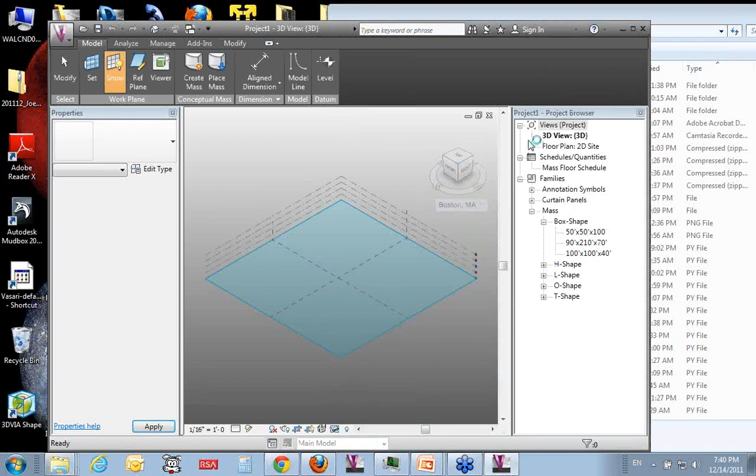There are other ways to program that are basically a scripting language, an easier way to run something where you just write a quick script. You can actually compile it right then and there in a way that runs quickly in an interpreted manner and get immediate feedback to see if it works or doesn't. That's something we can support on top of Revit and Vasari now as well. It used to be that you had to go into a separate environment to program, but now using languages like Python that are very generic and used across the industry, and more importantly mapped to the Revit API, you can do the exact same thing. We have an example of that here that'll come up in a second.

Exactly, so the question is, does this change the prescribed way to develop on top of the Revit API? It used to be that you had to go into a separate environment, like I said. There was something called Visual Studio Tools for Applications that lets you get into a more script-like environment, but you still ultimately need to compile. This is taking it a little bit further, sorry for getting a little geeky here. This is a pure interpreted language that runs on top, so you don't need to recompile, you don't need to drop the application and come back.

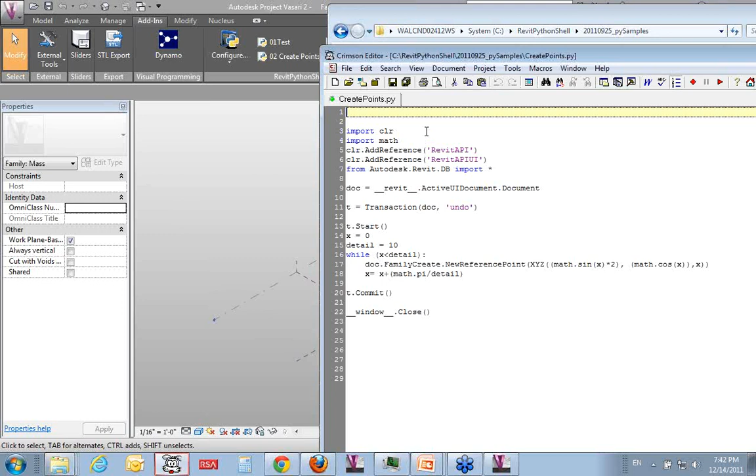Yeah, you should take a look at this too. This is what our team does, either developing these things ourselves or working with various other interested parties that are out there developing these things because they're advancing the state of the Revit platform. Sorry, this is super geeky, but we can get into this if you want. This is the create points thing.

We're going to show how nerdy we are here. Right.

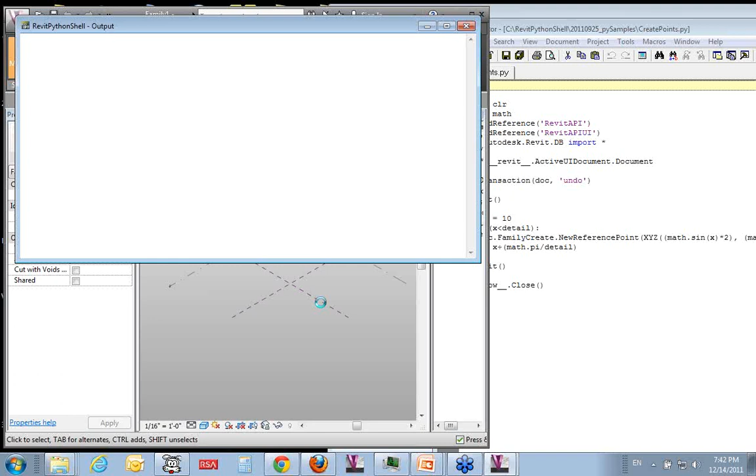So this is just to your question about scripting. This is a little script that goes through and creates a bunch of points in space. I can live edit the script that creates those points over here in a text editing file. There's a bit of code at the front that calls information important only to the Revit API, and then it does some stuff that's generic math for any API. People familiar with this kind of work will be able to more quickly get into using these tools.

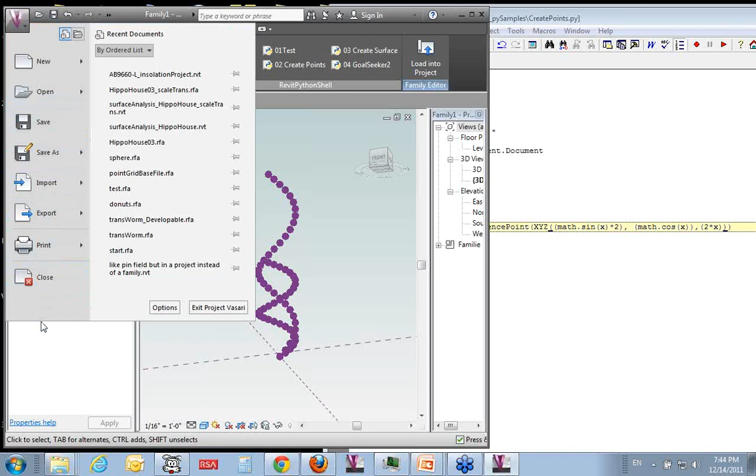I haven't used this script in a while, but if I wanted to change how these points were laid out in space, I can go in and try to do this correctly if I remember. I just save it, and then rerun it. Here's my altered script and the original script. So basically, you don't have to go write a fully compiled application and a plugin and then plug it in — you can just start interacting. That's kind of where we are with some of the tools our group inside Autodesk is developing, or working with other people outside in the industry who are developing things as open source efforts or other initiatives.

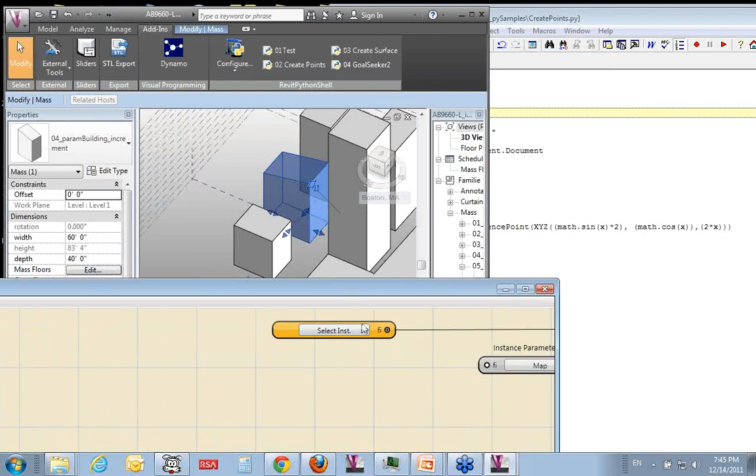Okay, so do you guys want to see it? Let's try this Dynamo thing again. As I mentioned before, we have this parametric family. We're going to start up the Dynamo project here, and load this workbench that has a pre-configured set of things. We'll select that instance, interrogate it, and then do the solar radiation calculation one last time — this will take just a second.

Okay, we're just going to read that file in. We get this data, and now we're going to wire it into the family. Okay, so now we see it update. And as we toggle this — there we go. So now it works, okay great.

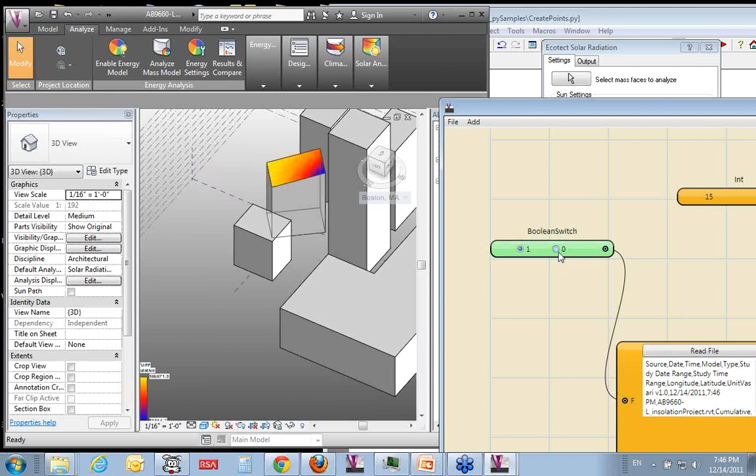As I step through this, you can start to see that rotation value changing. What we're doing is just stepping through to find an optimal shape. You can tell because the computed sum value from the optimizer keeps getting bigger along the way — some other little bug is happening here. So it'll keep stepping around until it gets to the optimal shape. There we go. It'll just keep going, and I think the magic number is around 13.

The logic basically says keep stepping until you hit either the max number of iterations or a max value. You can see we're at increment number 8 right now, and it'll probably end up going to around 13 or so as we step through. Of course, you can fully automate this as well — it was also used as a teaching tool for the class we taught.

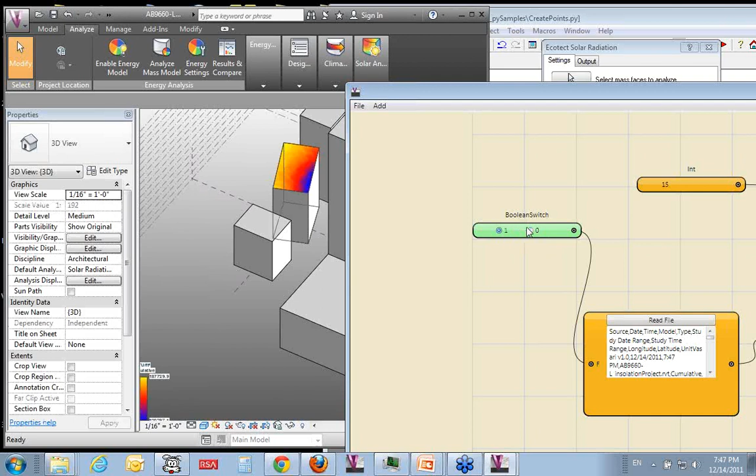And then as we hit that max value, it'll stop — that's basically what it's doing. It's climbing uphill where these values are getting bigger. The proxy of this is the amount of yellow, which just means there's more and more energy coming in. So it'll keep going until it doesn't, and when it doesn't, that is essentially the local optimum.

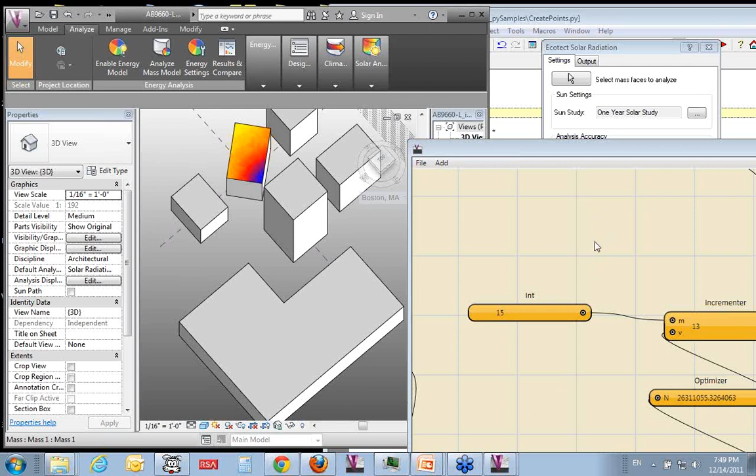So should I stop the recording for questions? Okay. Well, that's the end of the meeting, thanks everyone for coming in. See you guys next month. Bye — we totally forgot, what else?